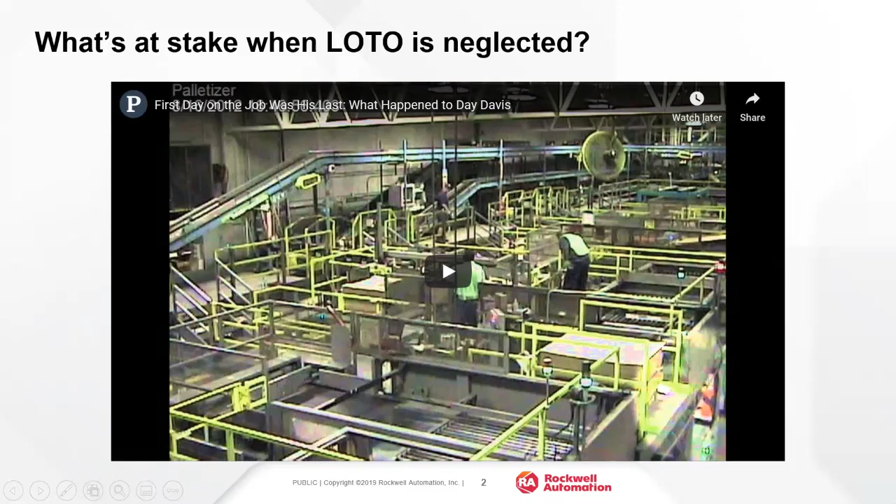This is the Bacardi bottling plant in Jacksonville, Florida. It's August 16th, 2012 at 4:30 p.m. What you're seeing here is a palletizer, a machine that packs and stacks cases of rum onto a pallet. The man you see here operates the palletizer. He's been cleaning the machine because bottles often break in the cases and the rum leaks on the conveyor belt, making it sticky. When this happens, the cases then crash into each other and bottles fall to the ground. This has been happening for a couple of years at Bacardi, and it hasn't been fixed.

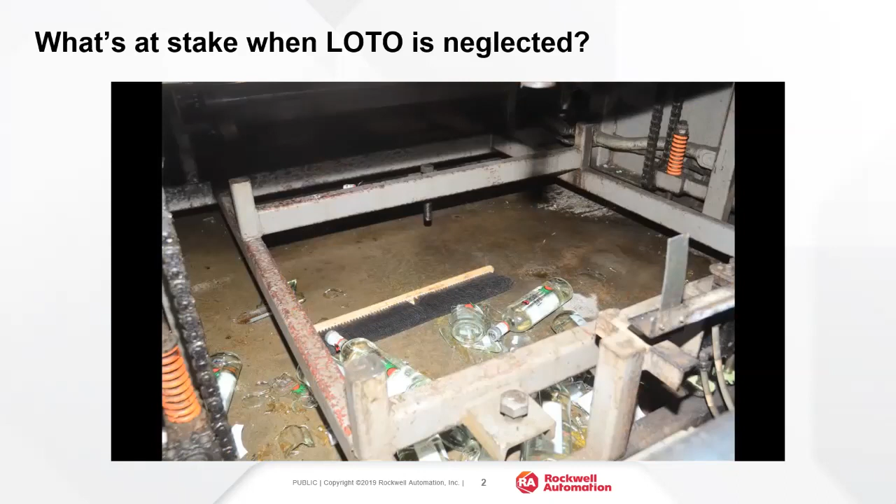As the operator walks away, cases start coming down the line very quickly and crashing into each other. He hits the emergency stop button. Now, what's supposed to happen next is operators need to put a lock on the machine to prevent somebody from pushing the start button while someone else is inside. Under the machine, there's a lot of shattered glass as seen in these photos. There's also another emergency stop button and some bars that you can put underneath the platform to keep it from falling. But employees rarely did this for fear of slowing down production.

The man in the orange vest is Day Davis. He's a temp worker on his first day on any job in his entire life. In fact, his shift started just an hour and a half ago when he sent this photo to his fiancée. The operator points down below and tells Davis to sweep up the glass under the machine. Look at the bottom right-hand corner of the screen. You'll see Davis go underneath the palletizer to sweep up the glass. A few minutes later, Davis goes back upstairs to ask a question.

The man in the white shirt, who's a supervisor, told police he had told Davis to sit by the side, but others heard him tell Davis to simply go get some gloves. Davis goes back downstairs underneath the machine. The supervisor and operator finish cleaning the conveyor rollers above Davis. They close the gate and turn on the machine. Cases come down the line, they're pushed into a square, and the platform goes down.

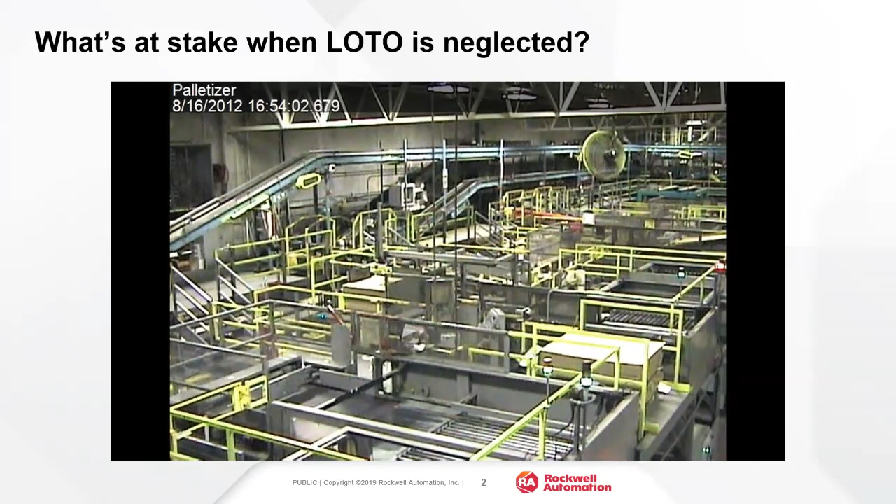Then they hear a yell. They see that Davis has been crushed by the machine. They hit the stop button. The palletizer operator is trying to manually raise the platform off Davis, but it's not working. The supervisor radios for someone to call 911. Here you'll see a worker pass down a pry bar to see if they can lift up the platform. There were some 60 cases weighing about 2,000 pounds on the platform when it went down. First responders got there within minutes, but it was already too late. The weight of the machine had killed Davis.

When we talk about lockout tagout, the purpose is to prevent the unexpected restart of equipment during any service that could harm employees.

Lockout tagout is one of the top 10 citations yearly since it was introduced as a regulation in 1989, and in manufacturing environments it's often the top cited OSHA violation.

When we look at the lockout tagout citations that were issued, this is from Safety and Health magazine, from fiscal year 2018. It's the fourth most cited violation section.

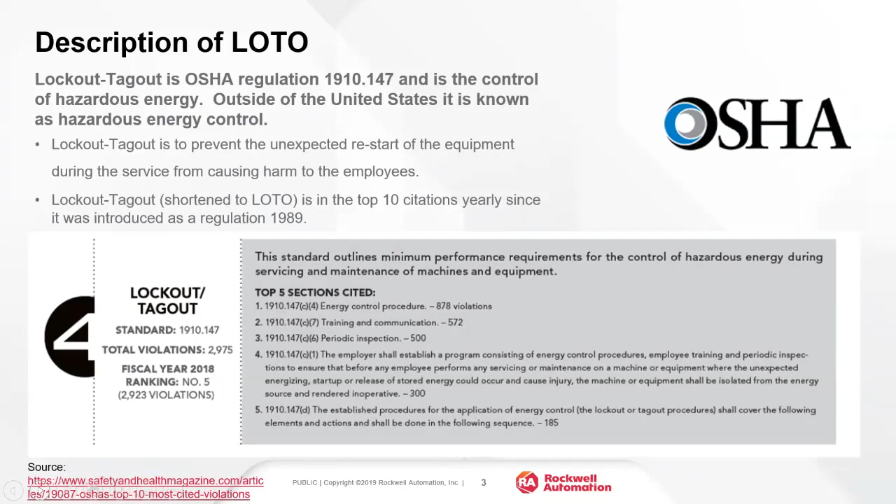The top sections cited are having energy control procedures, training and communication, periodic inspection, those annual audits, and then having a program in place with the appropriate sequence for actually shutting down the equipment.

If we look back at the video from Bacardi, the employer failed to provide an adequate number of lockout devices to perform lockout procedures and to conduct a periodic review, those annual inspections of lockout procedures. They also failed to properly train their employees in methods and means for isolation.

When we talk about lockout tagout and making sure people are doing that, the idea, according to the Assistant Secretary of Labor, is a worker's first day at work shouldn't be his last day on earth. So it's really important that we put together a program that is safe, sustainable, and that people will actually use, because the consequences of not doing so could be very serious.

When we talk about what we want to do when we put together a lockout tagout program, there are 5 components: corporate policy, machine-specific lockout procedures, employee training, locks and devices, and annual audits, which is that periodic inspection people are talking about.

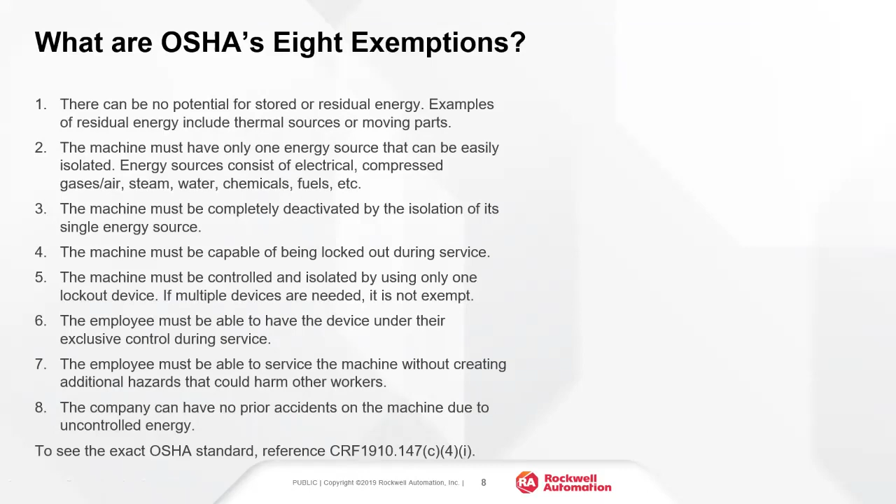Now that we've walked through a situation in which a piece of equipment wouldn't need a procedure, if the equipment does need one, what does that procedure need to look like? A lockout procedure has a few required components: a statement of the intended use of the procedure - what's the purpose - methods for shutting down and controlling the hazardous energy, steps for the placement and removal of locks and devices, and ways to verify that the machine has been properly locked out.

In this procedure here, as an example, we've got our device - how we lock it out, where it is, the method used to lock it out - and critically, we also have this check step: how do I know that I've properly isolated that source of energy for this particular piece of equipment? Procedures should also include information about the specific type of energy and the magnitude of the energy.

If we look here, it's kind of hard to see, but we've got an electrical source, and we also have the magnitude - in this case 480 volts. We want to make sure that information is included in the procedure. Here we've got 4 sources of lockable energy, but it's also important to include that there are non-lockable sources of energy on this piece of equipment - we've got thermal energy and kinetic energy also. We want to make sure both lockable and non-lockable sources of energy are called out in our procedures.

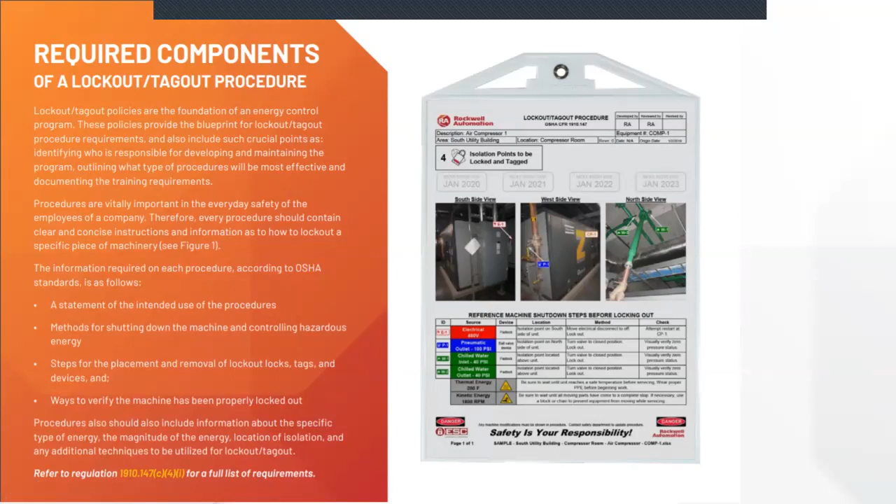If we look at this piece of equipment, the whole intention of having procedures is: when I walk out to this equipment and need to perform maintenance, how do I lock it out, and have I recognized all the sources of energy on this machine, and do I remember how to lock each one out and verify that I've actually isolated those sources of energy? If I'm just looking at the machine and I regularly service multiple pieces of equipment, it's hard to remember all that information and keep it straight. So the idea behind lockout procedures is that you have that information right at the point of use, so as you're locking out the equipment, you know exactly what to do.

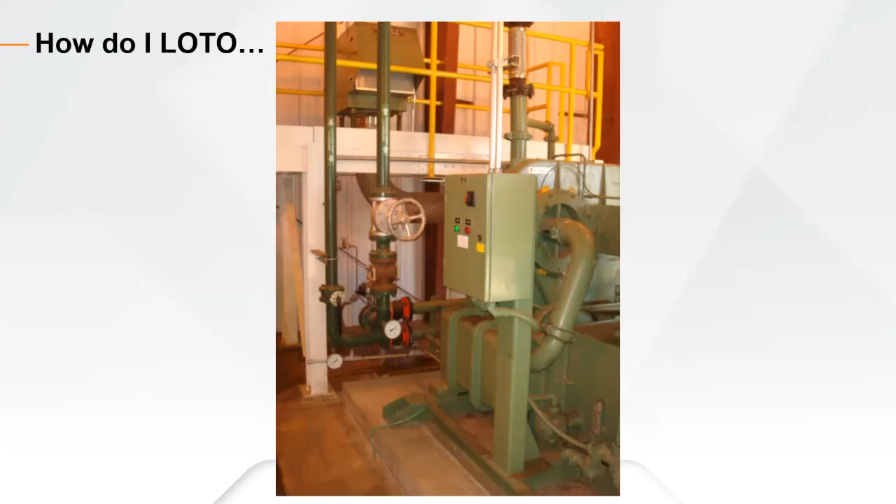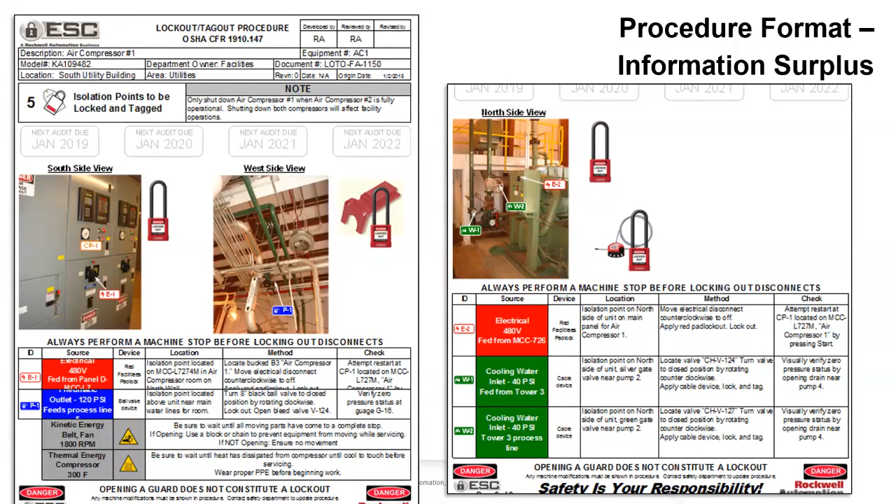Okay, so moving on to policy creation. A policy has to have a few key elements in it: scope, purpose, and means of program enforcement, definitions and responsibilities, provisions for written procedures, employee training and annual inspection, and instructions for special circumstances.

So how are contractors and visitors handled from a lockout perspective? What are your policies around group lockout? What happens at shift change? And then what are your policies for lock removal?

If there is a situation in which an employee left the facility for a day, or left and went on vacation, what are your policies around removing that lock when that machine is in a locked out condition? So those are the things you want to consider as you build that policy, and you should regularly review it to make sure it's still meeting the needs of your facility.

Beyond that, we talked about procedures and having policies in place. The next big thing is employee training. You should have training documented for authorized and affected employees. Authorized employees should have training that includes recognizing hazardous energy sources, types of energy and magnitude, and the methods and means for energy isolation and control.

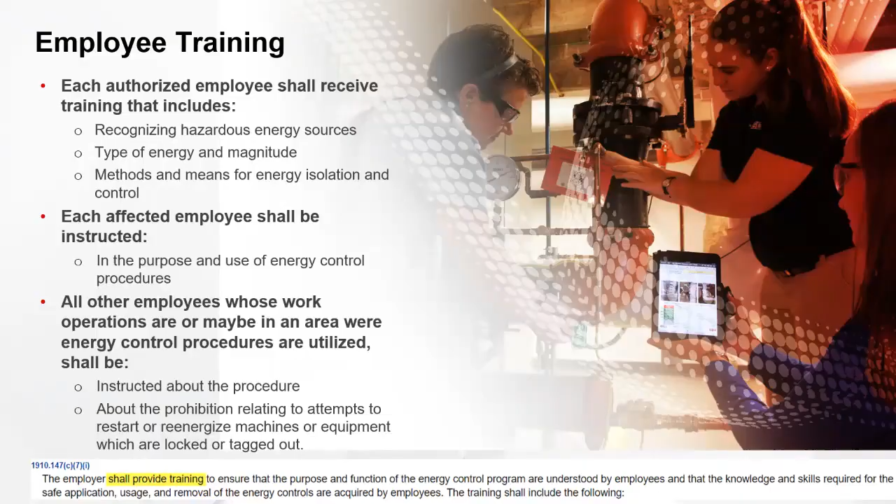Other employees whose work might be in an area where energy control procedures are utilized should be instructed about the procedure and about the prohibition of attempts to restart or re-energize machines which are already locked out, locked and tagged out devices. That's another key step in our lockout tagout program.

Lockout tagout devices should be singularly identified, only used for controlling energy and not for other purposes. There's a list of requirements here: they're durable, capable of withstanding their exposed environment. So if you've got a really harsh environment, you want to make sure you're selecting locks and devices that are going to stand up to that.

They should be standardized within the facility with at least color, shape, size, and tags in print and format. Substantial enough to prevent removal, so you don't want to be able to just pull a lock off, and printed so that exposure to wet or damp conditions won't cause the tag to deteriorate, and substantial enough to prevent inadvertent removal.

These are key things to remember when looking at devices for your lockout tagout program. You want to make sure you have those devices in place, that you have enough of them, and that they're readily accessible to the teams that need them, so they don't have to walk across the facility to get the devices they need for lockout tagout procedures.

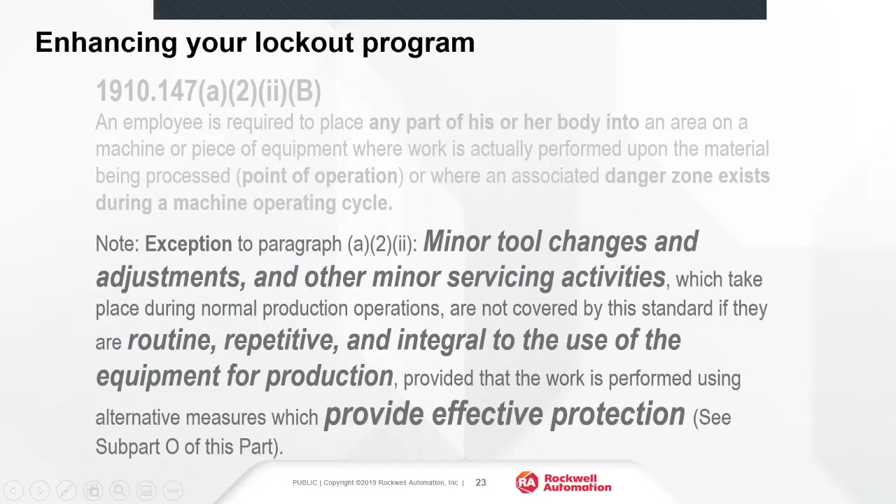This minor servicing exception allows you to do things like a minor tool change, potentially something like clearing a jam. So you can use an alternative method for protection in lieu of Lockout Tagout, provided it meets the criteria of the minor servicing exception. And that can actually save you quite a bit of time.

If we look at this procedure here, let's say this Lockout Tagout procedure takes 5 to 6 minutes, and let's say what you're doing is a minor tool change, but I've been able to implement some alternative method of protection that's as effective as Lockout Tagout, without having to fully lock out my piece of equipment. Using that alternative method might take me a minute to put the machine in a safe state, make my tool change, and get back up and running—versus the 5 to 6 minutes it would take to fully lock out that piece of equipment.

The other thing that's really key here about using alternative de-energization procedures or alternative methods of protection is that they're really complementary to an effective lockout program. If you can get employee buy-in to do lockout tagout when it's necessary, and also support your employees by giving them alternative protection measures for things covered under the minor servicing exception, they're able to keep production going smoothly where possible, and they'll be more likely to use their lockout procedures when it's necessary.

Taking advantage of that minor servicing exception, putting alternative protection methods in place so your employees can execute those minor servicing tasks without full lockout, is a really great way to get buy-in on your full program because it's enhancing their ability to get their jobs done. That's a really key point for enhancing your program.

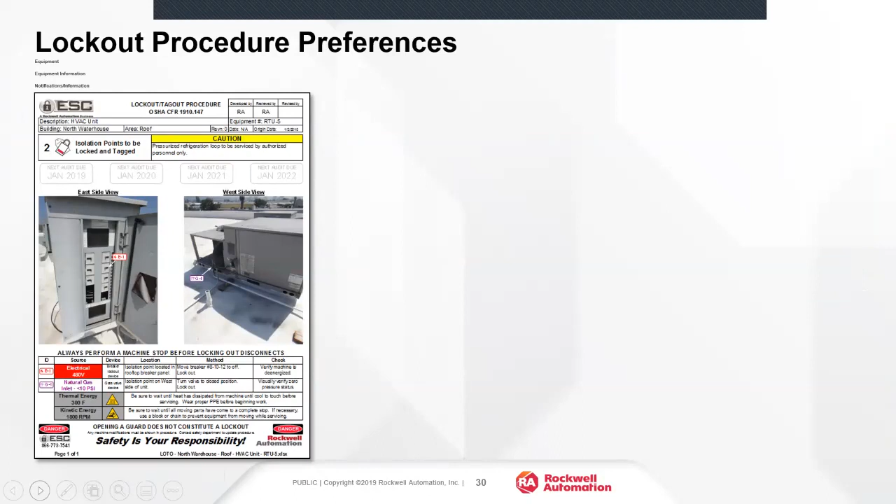And then let's talk for a little bit, right? Once we've talked about some of the concepts that we want, but what are the teams that you might want to put in place in order to really effectively get your lockout tagout program across or up and running, right?

So a program owner, right? That might be someone at the facility who's in environmental health and safety. That might be somebody who's at corporate, could be a plant manager, somebody in production, who might be the expert, right? That might be somebody in EHS, but it might also be someone else on the staff.

Is there a machine expert, right? Somebody who knows the machine really well and understands where the isolation points are and what the typical approach is for them to lock it out, so that you're creating procedures that are useful to the teams, right?

Who's the end user, right? It could be maintenance, could be an operator, potentially a contractor. If you have contractors coming in to perform maintenance, you want to make sure that you're considering them.

Who will be the creator of these procedures, right? That could involve many people: EHS, maintenance, operators. And then who's going to approve those procedures and make sure that they're accurate, right? Is there someone who can manage that sort of approver and quality check step on all of your procedures?